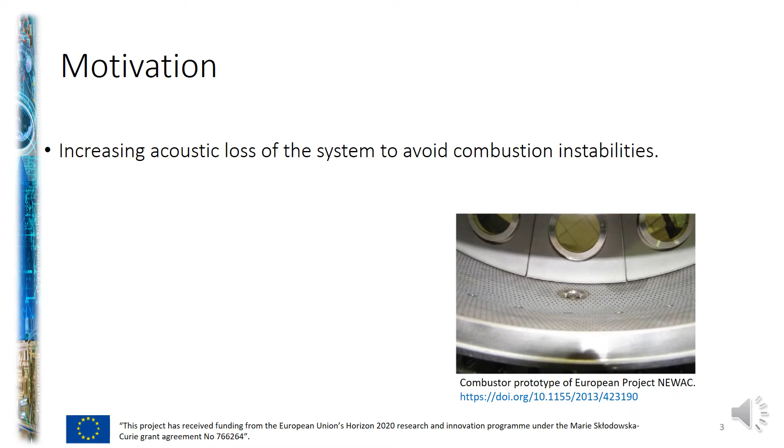Combustion instabilities may lead to structural damages to the combustor or flame blow-off. One method to avoid these instabilities is increasing the acoustic losses of the system by damping acoustic pressure pulsations. In this project, perforated liners are focused on as acoustic absorbers.

To predict the behavior of perforated liners in damping acoustic pulsations, several impedance models are proposed and available in the literature.

In practice, orifices are closely distributed, such that the interaction between acoustic radiations from neighboring orifices can affect their acoustical behavior. However, most of the models neglect the interaction effect between the holes.

The hole-to-hole interaction effect may change the resonance frequency of the resonator due to the non-planar wave creation in the cavity, the orifices in the perforated plate, and in the near wall region in the combustor. Considering this effect may help to predict the resonance frequency of the resonator accurately.

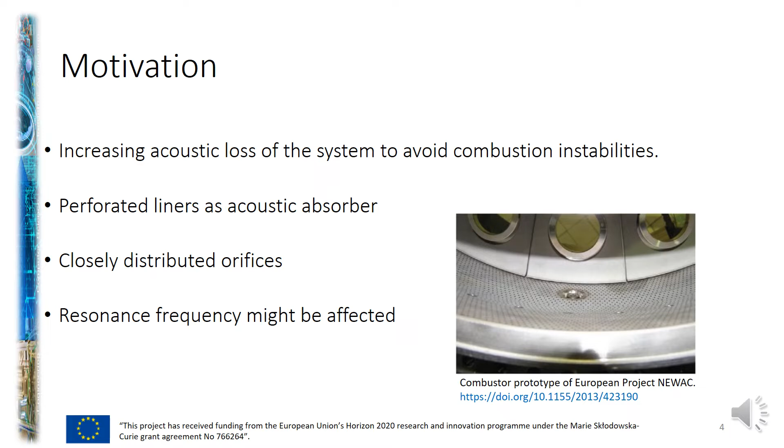The goal of this project is acoustic modeling and characterization of perforated liners. For the modeling part, the effect of hole-to-hole interaction is modeled analytically and analyzed numerically. For characterization, the acoustic behavior of perforated plates focusing on the hole-to-hole interaction effect is experimentally investigated.

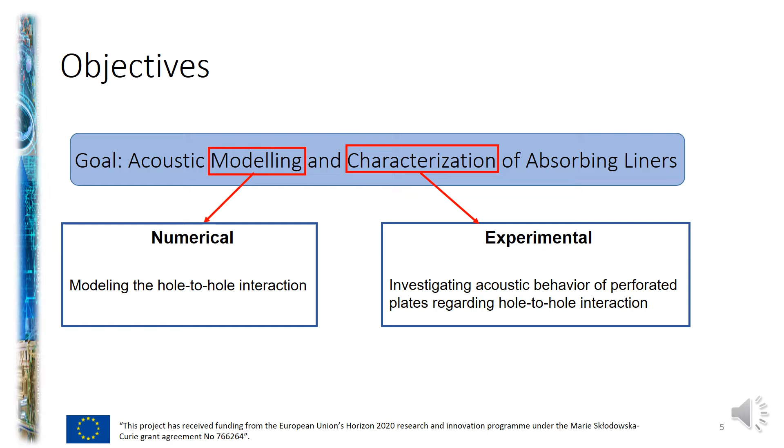What is end correction? At low frequencies, plane waves can continuously propagate in a uniform duct, so plane wave theory is fully sufficient. However, at the area jump, evanescent non-planar waves are created.

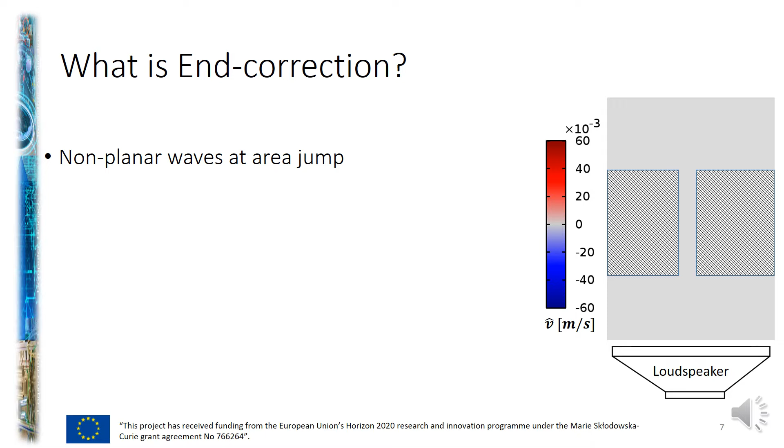The effect of these non-planar waves can be integrated into the plane wave analysis by using an equivalent acoustic impedance at the area jump, or what can be called additional length or end correction. Here it is denoted as L prime.

Several authors studied acoustic radiation theoretically and experimentally and proposed expressions for the end correction. The effect of orifice radius is considered in several previous studies, but these expressions do not consider the effect of orifice spacing and are therefore inappropriately used in impedance models to account for the hole-to-hole interaction effect.

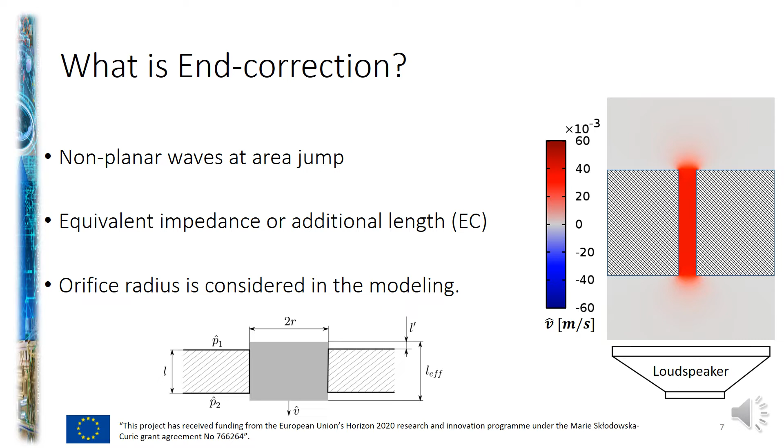For two plates with the same orifice radius and different orifice spacings, the acoustic velocity magnitude in the vicinity of orifices is shown. When the orifices are distantly spaced, as shown in the figure on the right, each hole's acoustic radiation might be only slightly affected by the neighboring holes. When the orifices are close to each other, as shown in the figure on the left, the acoustic radiation of holes is strongly affected by each other.

The region with oscillating mass extends on both sides of the orifice. The acoustic velocity does not diminish so rapidly due to the combined momentum of the interacting jet flows from neighboring holes.

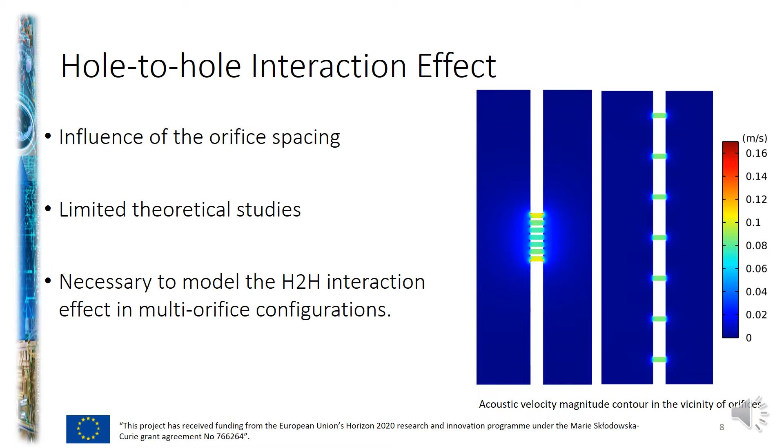The theoretical studies are limited to the two-hole configuration, where only two orifices are placed on a plate. Therefore, it's necessary to theoretically investigate the multi-orifice configuration.

In order to investigate acoustic propagation through small orifices in a multi-orifice configuration, the wave equation is solved in the domain composed of a perforated plate and a cavity. In this schematic view, R0 stands for the orifice radius, RC is the cavity radius, LC is the cavity depth, and LP is the thickness of the plate.

A general solution of the pressure in the cavity and orifice is presented. By imposing boundary conditions and forming a matrix set of equations containing the description of boundary conditions, the solution of the acoustic field inside the domain can be determined.

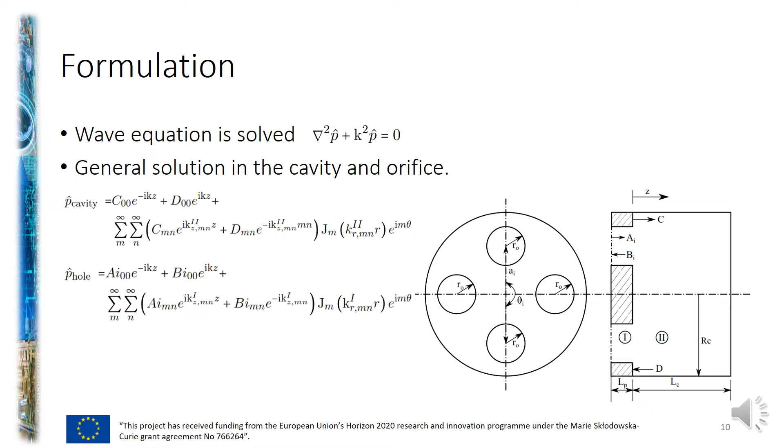By solving equations for a number of higher order modes, M and N, pressure amplitudes for waves A, B, C, D can be acquired.

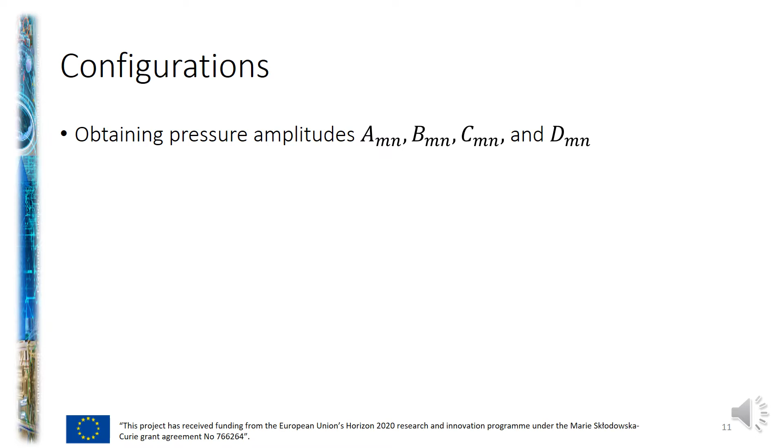Normalized end correction is defined as an additional impedance. Here, subscript 00 stands for the fundamental mode.

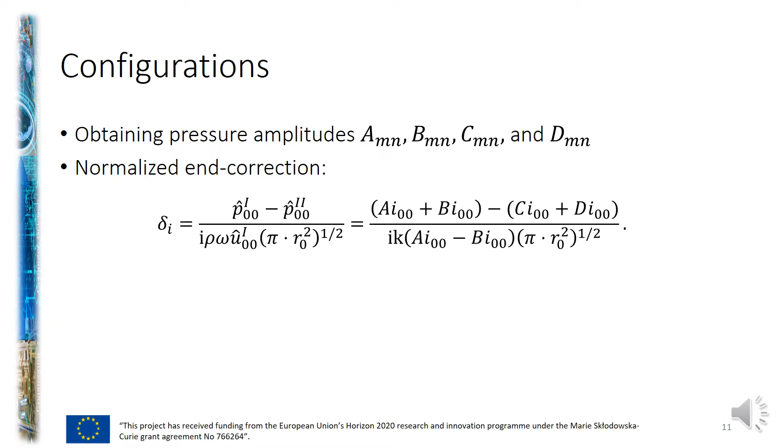Several perforated plates with different orifice radius and spacing were studied for the triangular, square, and rectangular patterns. As shown in this figure, triangular configuration is denoted with P, S stands for square pattern, and SA for rectangular. The range of orifice radius and center-to-center distances are presented in this table, along with the number of cases for each configuration, which were studied analytically by this method.

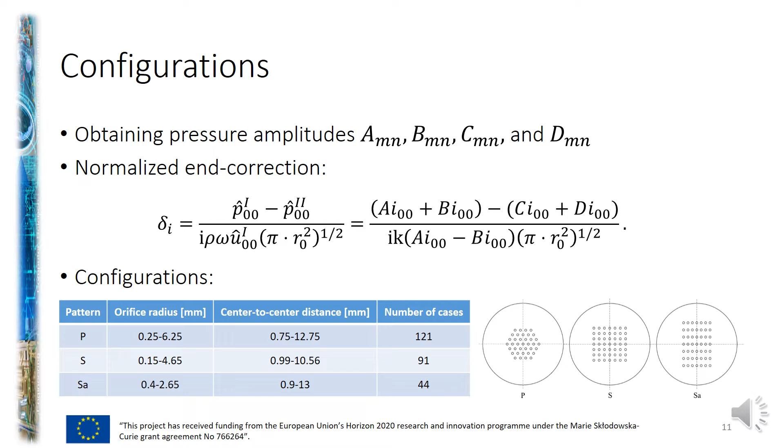To investigate the hole-to-hole interaction effect, the wave equation excluding viscous and thermal losses is solved in the frequency domain based on the finite element method. The three-dimensional computational domain is similar to the impedance tube used in experiments. The excitation is applied at the inlet.

The maximum absorption of the resonator happens at the frequency where the acoustic reactance is zero, or where the pressure and velocity are exactly in phase. This frequency coincides with the resonance frequency of the resonator.

End correction is calculated by having the frequency, the resonance frequency, A, which is the sum of open area, V is the cavity volume, and LP prime is the length of orifice, which is the thickness of the plate plus the end correction. By having all the parameters, the unknown, end correction, can be calculated.

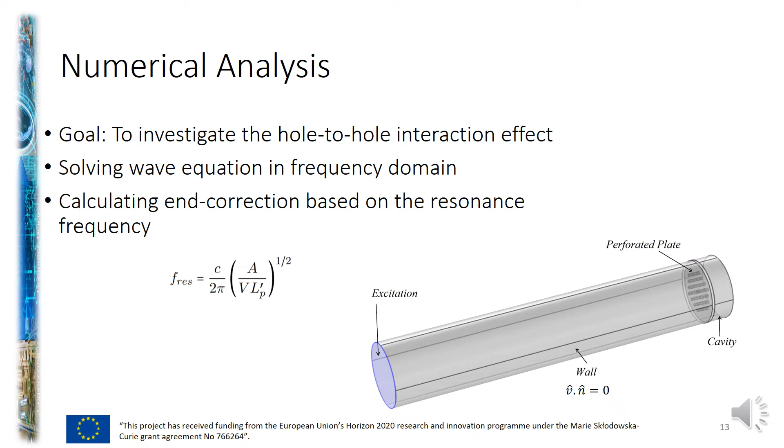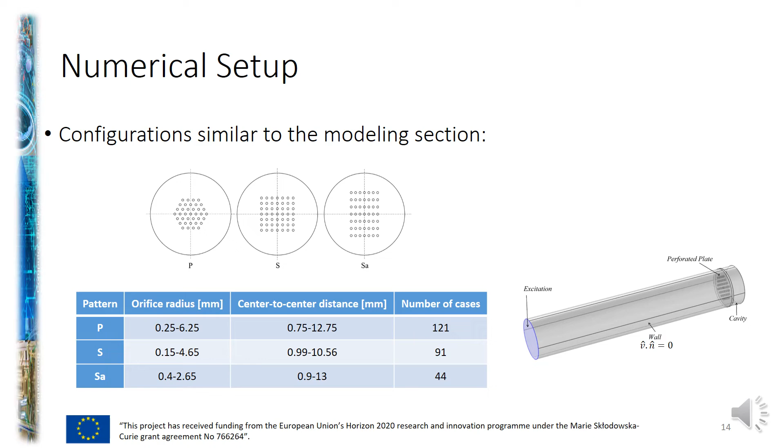Similar configurations to the modeling section are studied using FEM. In this figure, the normalized specific acoustic reactance of several plates obtained using FEM are presented.

As shown here, by keeping the orifice radius constant and increasing the distance between the orifices, acoustic reactance curves shift to higher frequencies. This increase in resonance frequency implies that the end correction decreases by increasing the orifice spacing, according to this equation for resonance frequency.

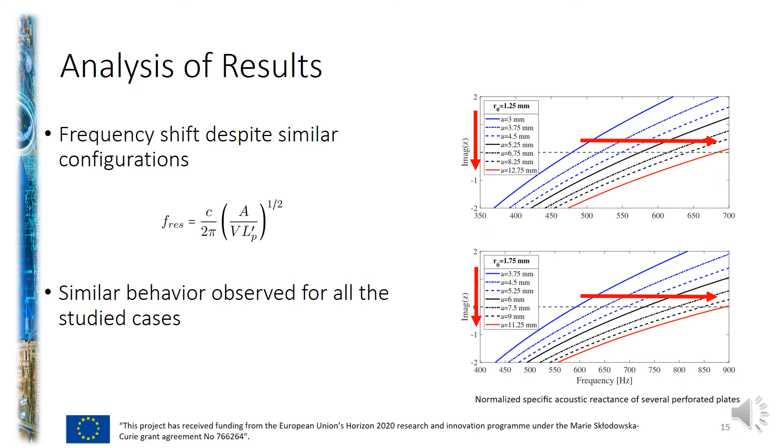Similar behavior is observed for all the studied cases. The normalized end correction for all perforated plates in the ranges listed in the table are obtained from FEM and presented for P and S patterns in these figures.

Results show that decreasing the distance of orifices increases the normalized end correction, and vice versa. Additionally, increasing the orifice radius increases the end correction. Normalized end correction behavior may be related to the distance and the radius of the orifice. Therefore, a model is fitted to the results of the P and S patterns separately.

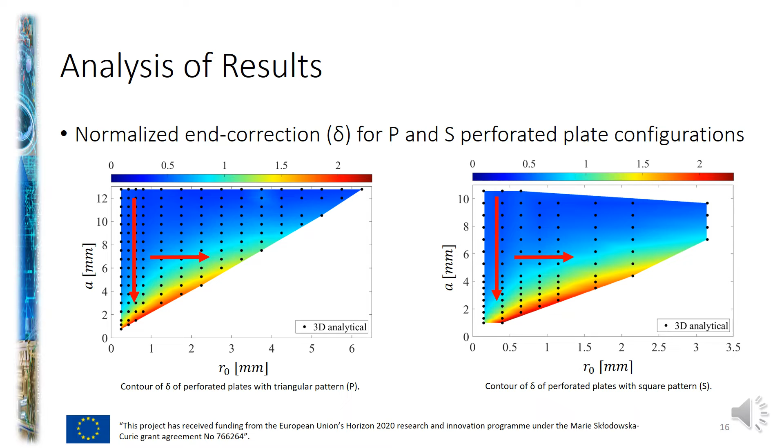In the results section, first we look at the configurations studied experimentally, then measurements without airflow, followed by the model's prediction, and measurements with airflow followed by the model's prediction.

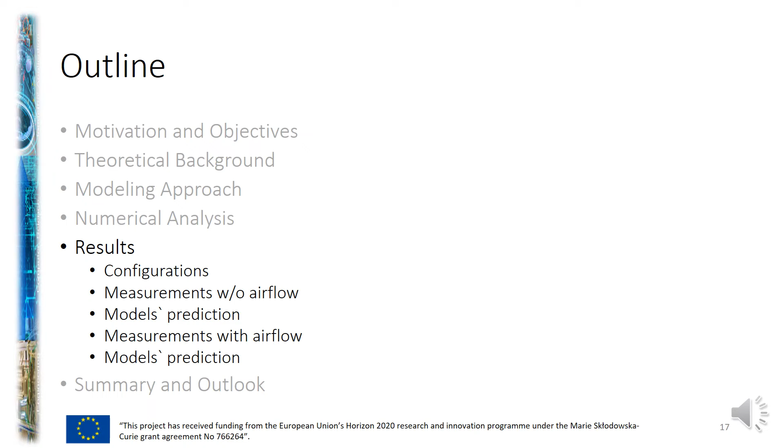These are the configurations of perforated plates studied experimentally. For each configuration—triangular, square, and rectangular—the orifice radius is kept constant and the center-to-center distance is changed. Therefore, the overall porosity, the open area ratio, is kept constant. This is similar for all the cases investigated.

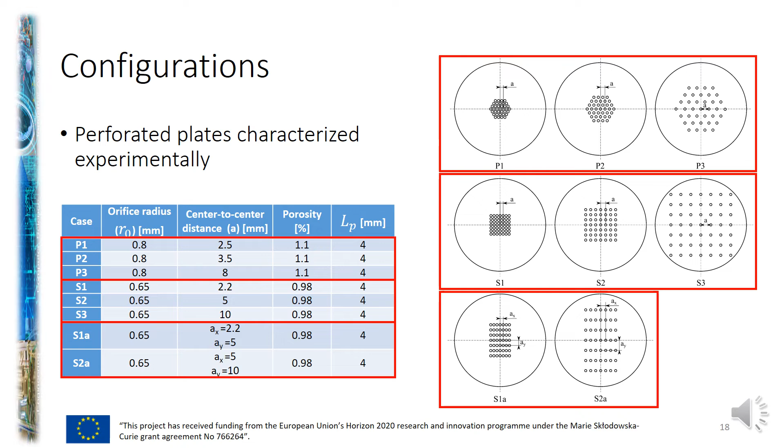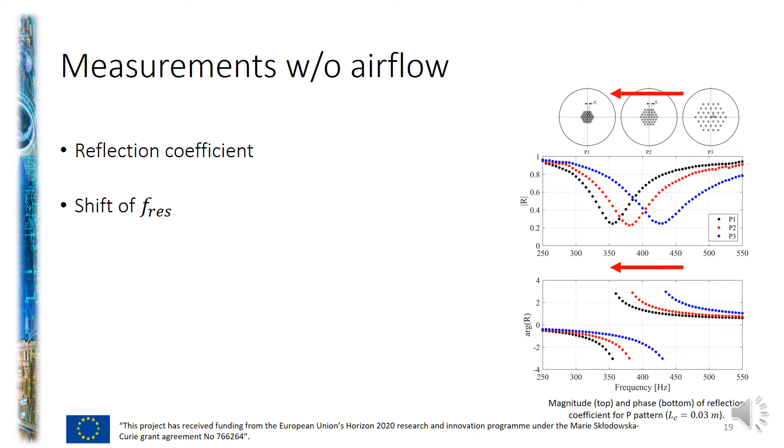In the absence of airflow, reflection coefficient of perforated plates is acquired. Results show that the resonance frequency shifts to lower frequencies as the holes approach each other. This implies an increase in the end correction, as all the geometrical parameters are kept constant except orifice spacing. The square and rectangular patterns show similar behavior.

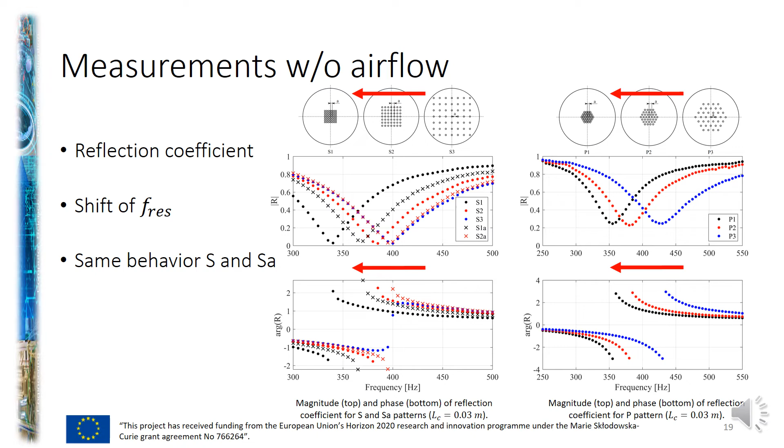The Bellucci model is used as the impedance model. The reason for the higher frequency is that the end correction model used by Bellucci is developed for a single orifice and neglects the hole-to-hole interaction effect. The 3D analytical method significantly improves the prediction of resonance frequency. Slight deviation may be associated with the number of higher order modes M and N considered to obtain the end correction.

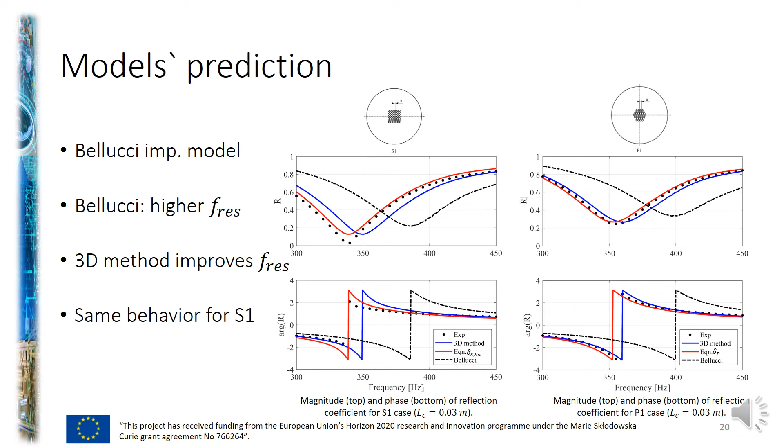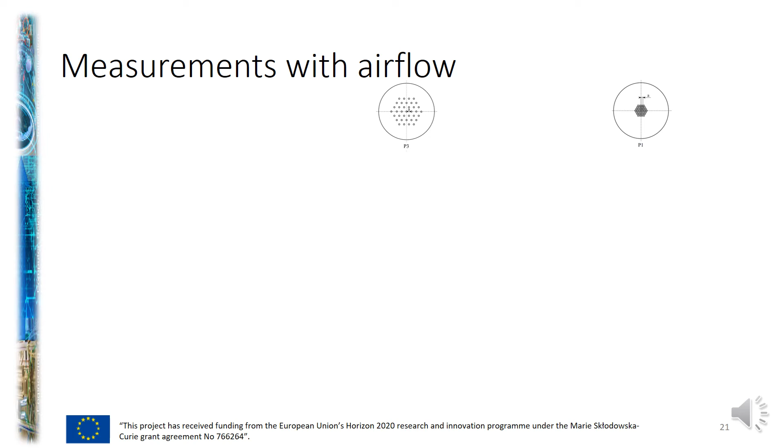A similar behavior is observed for the S1 case. To present the general influence of bias flow on the damping behavior of the perforated plates, considering the hole-to-hole interaction effect, P1 and P3 configurations are selected.

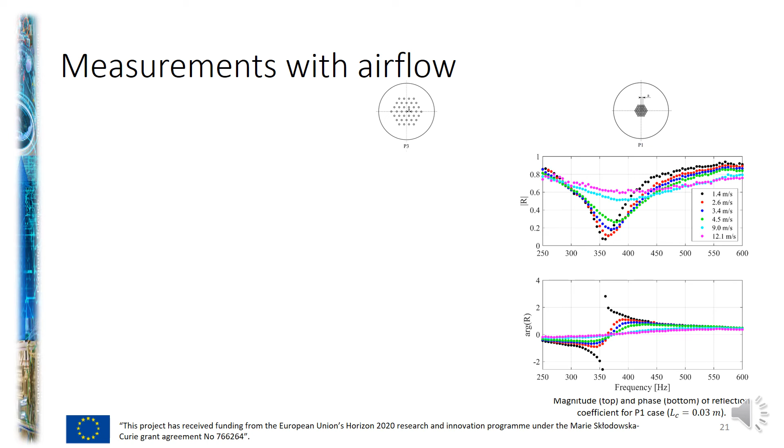Introducing flow and increasing its velocity shifts maximum absorption to higher frequencies. The maximum level of absorption is reduced while the absorption becomes broadband. Similar behavior is observed for the P3 case. However, the difference in resonance frequency between P1 and P3 cases can be noticed for each mass flow rate.

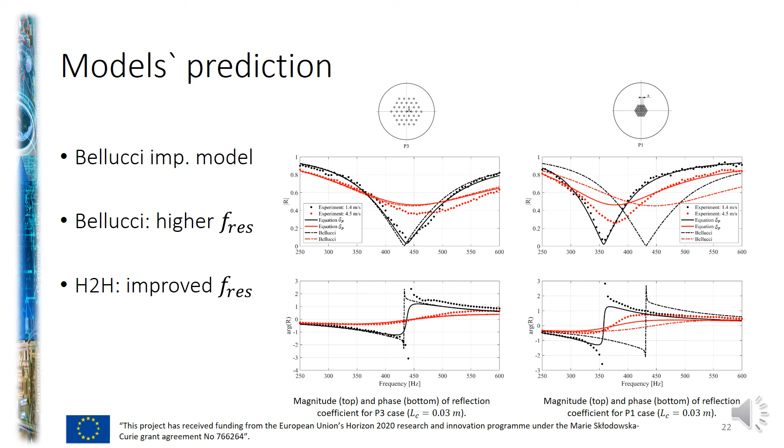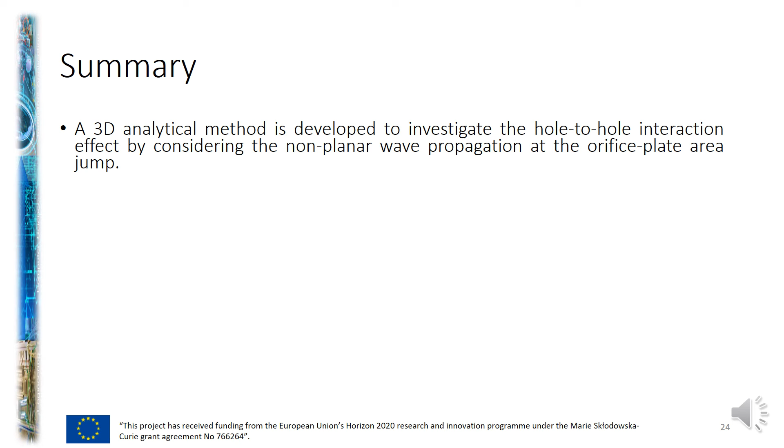To summarize the outcomes of this project, a 3D analytical method is developed to investigate the hole-to-hole interaction effect by considering the non-planar wave propagation at the orifice plate area jump. The hole-to-hole interaction effect for a series of perforated plates is studied using FEM, and a model for prediction of normalized end correction of multi-orifice perforated plates was proposed.

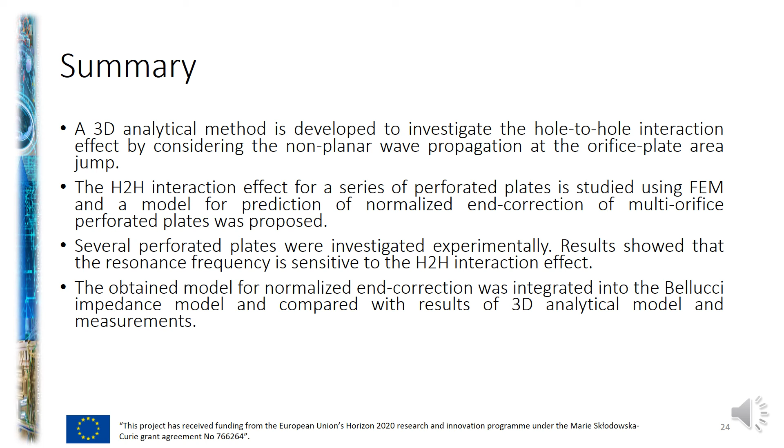Several perforated plates were investigated experimentally. Results showed that the resonance frequency is sensitive to the hole-to-hole interaction effect. The obtained model for normalized end correction was integrated into the Bellucci impedance model and compared with the results of the 3D analytical model and measurements.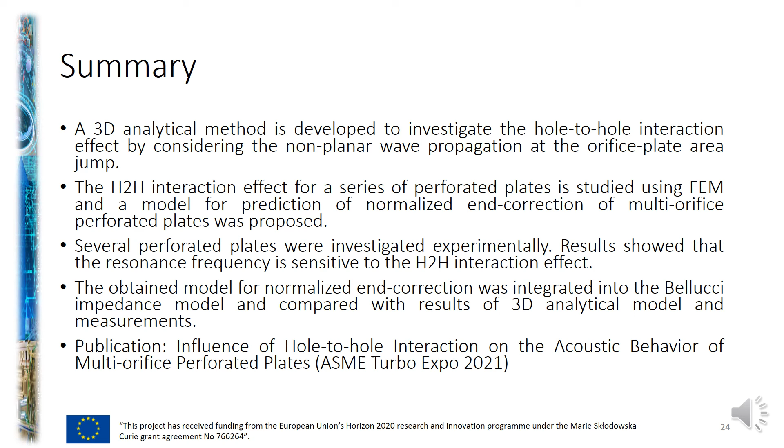Also, one paper was submitted to ASME Turbo Expo 2021, titled 'Influence of Hole-to-Hole Interaction on the Acoustic Behavior of Multi-Orifice Perforated Plates.' It received 3 recommendations for journals, and the results will be out in 2 weeks.